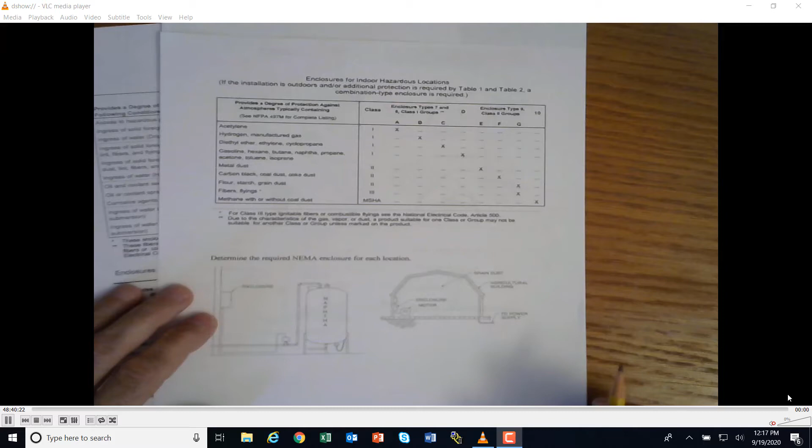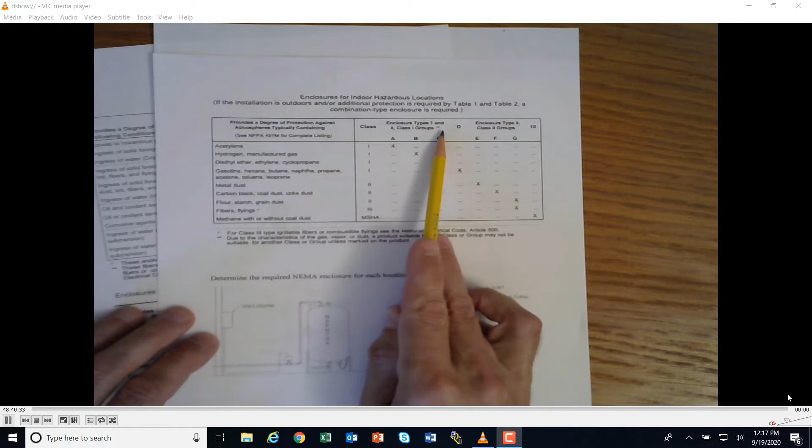We're going to take a look at our NEMA enclosures. So we're going to be working off a couple different tables. This is for indoor hazardous locations. These are my enclosure types, 7, 8, and 9, okay? If I'm talking about indoor non-hazardous locations, these are 1, 2, 4, 5, 6, 12, and 13. These are non-hazardous indoors. And then my other chart here is for outdoor non-hazardous, okay?

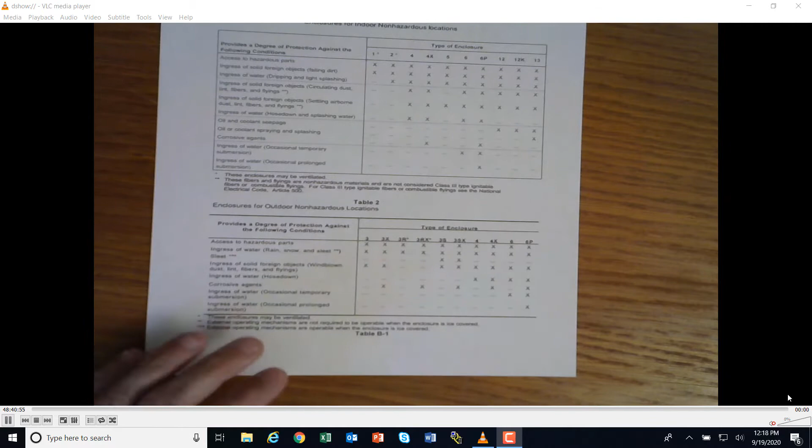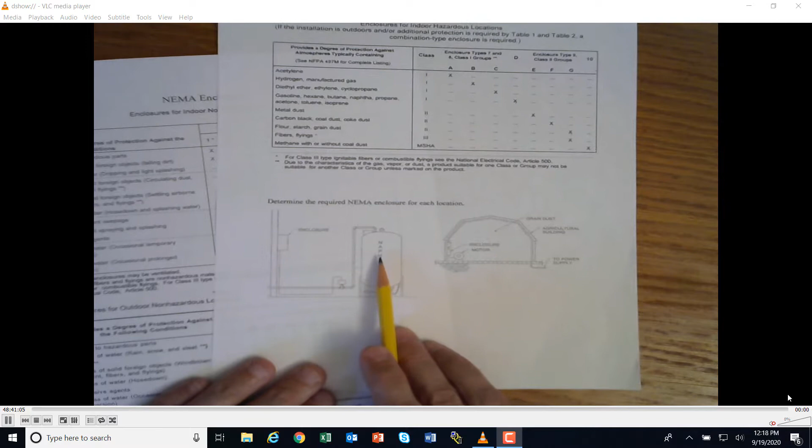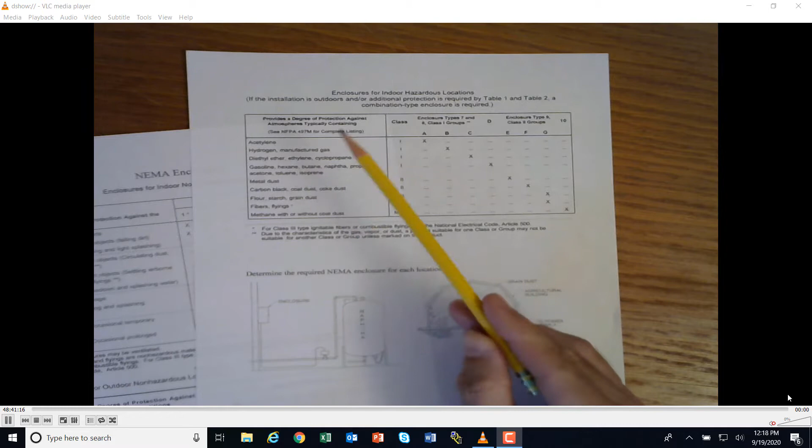So let's just take a quick look at a couple of these. The first one right here is showing a chemical, and it's inside. So this is going to be hazardous. So I need to go to the indoor hazardous location. So here's my enclosures for indoor hazardous locations. And if I start reading what kind of chemicals I'm looking at, there it's listed. It's going to be a Class 1 enclosure, and it says that I'm going to need a 7 and 8, Class 1, Group D.

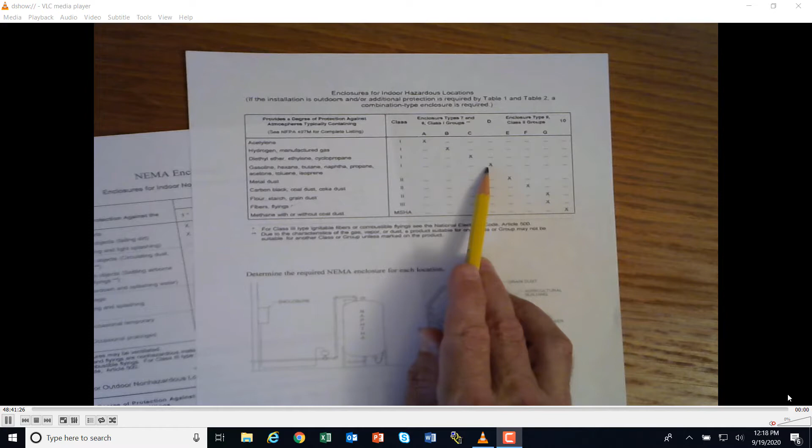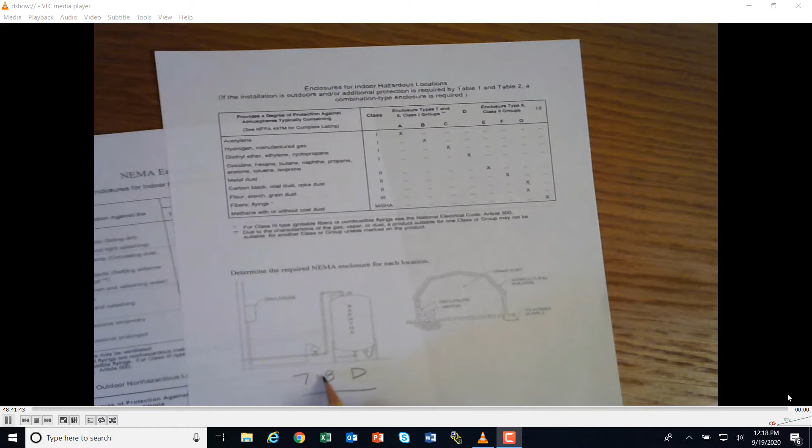So this is saying a combination 7 and 8 D is the type of enclosure that I would have to pick for this. And basically what that says is how sealed up this enclosure is going to be, how much spacing is going to be required and stuff like that, okay? Because you don't want to have any sparks here that might cause an explosion.

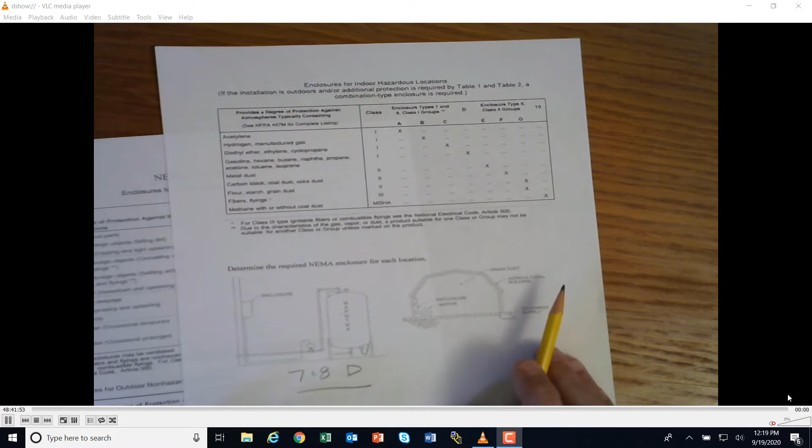Let's look at another one. This one is even more dangerous, it looks like, because we have grain dust in the air. Grain dust is really explosive. So if there's any sparks here, this is going to blow up. So you're probably going to need a totally enclosed fan-cooled motor, and you're also going to need an enclosure that's really totally enclosed and is spark-proof, okay?

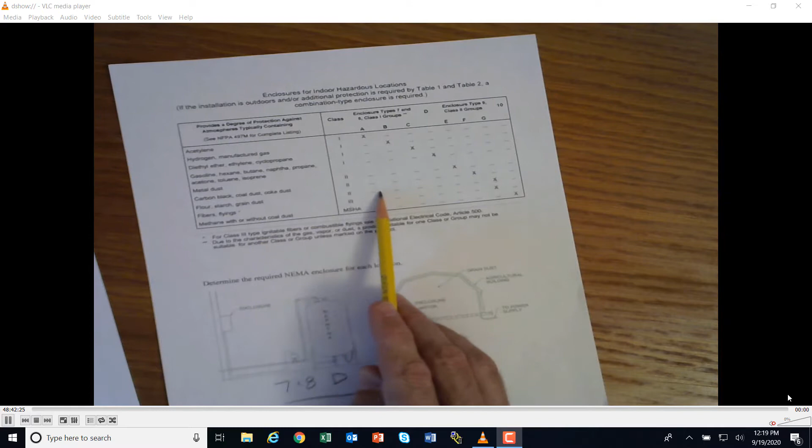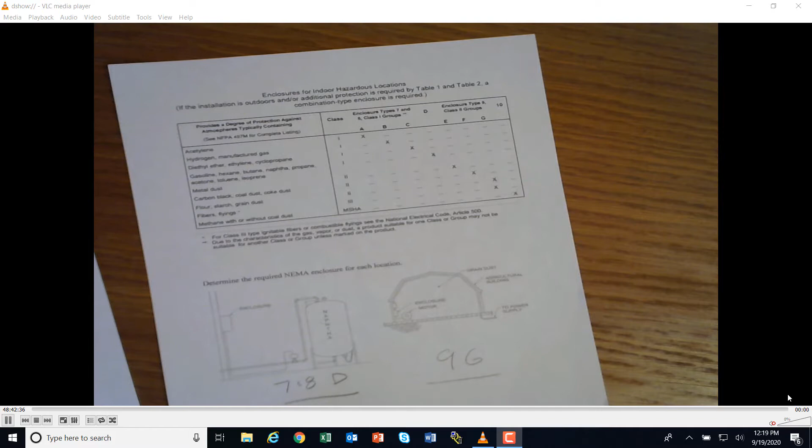So let's take a look. It's definitely indoors. It's hazardous. And if you're talking about grain dust here, you're going to need a Class 2 enclosure, and it looks like you're going to need a 9G enclosure. All right, and that's what you'd have to go with, and that would guarantee that you won't get any sparks here and you won't get an explosion.

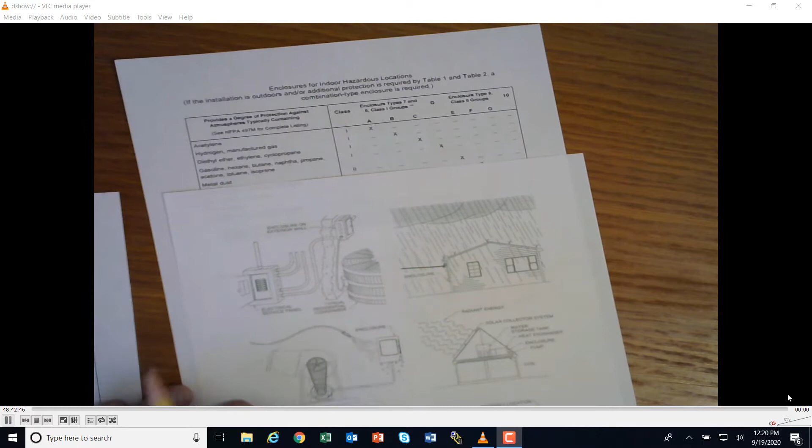Let's look at a couple more. This one right here is showing your air conditioner on the outside of your house. Now your air conditioner probably only runs in the summer. It's on the outside of your house, and it's going to get wet. But it's not going to get any snow on it. It's not going to freeze. So we're looking at outdoor non-hazardous, because your air conditioner is not going to blow up.

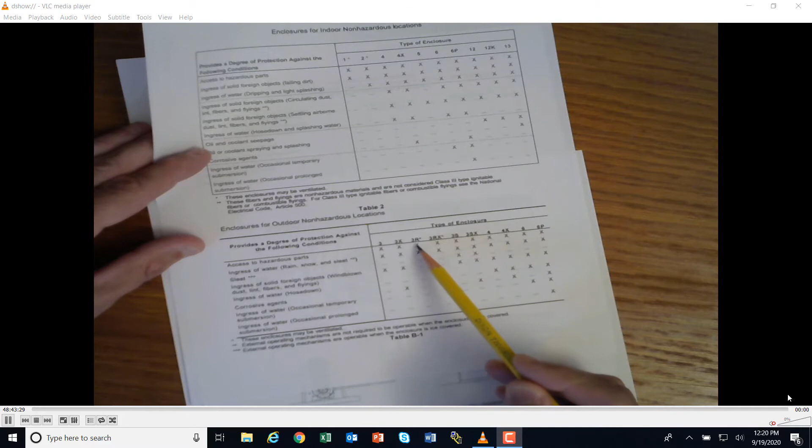So if I go to my outdoor non-hazardous, basically ingress of water, it's going to get a little water and sleet and some foreign objects from wind. That's what it's going to be exposed to. But there's really not much going on here. So probably any one of these are going to work here, a 3 or a 3R or something like these. I'm going to say that this is probably just going to need a NEMA 3 enclosure, and it's pretty inexpensive.

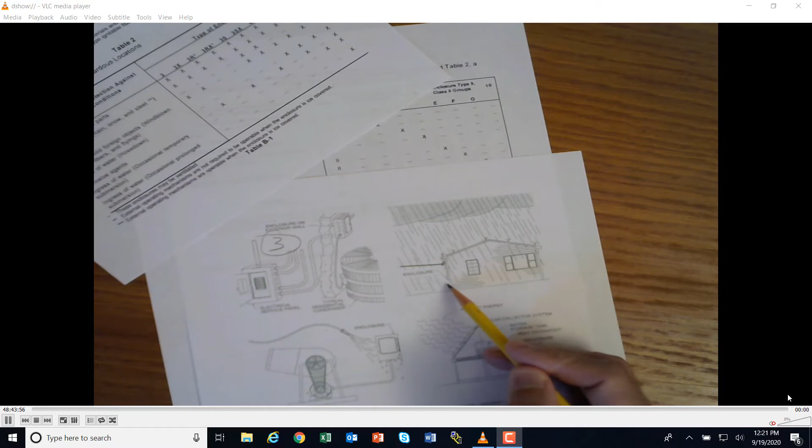This one right here is something on the side of your house. Looks like it is related to your electrical service coming in. And it's going to be, once again, rain and sleet, just like the air conditioner was. But I don't know where this house is, so maybe it's going to be exposed to the elements a little bit more, maybe freezing in the winter, okay? So once again, it's non-hazardous. If I go to the non-hazardous, I see sleet: may be operable when it is ice covered.

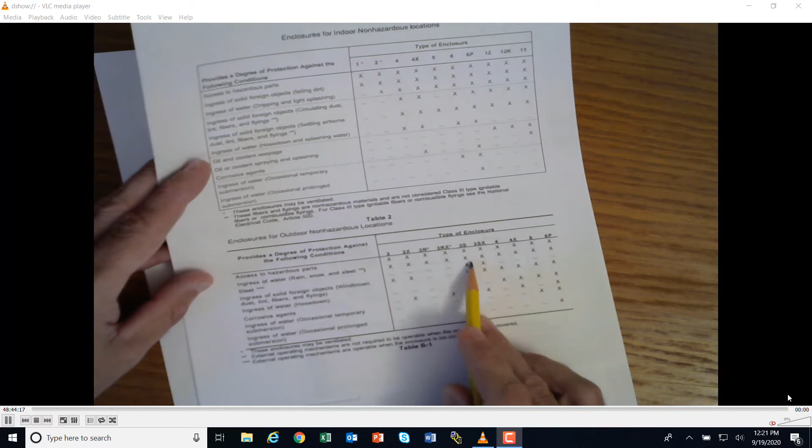Yep, so I'm just moving down this chart here a little bit, and it looks like I'm going to need a 3S enclosure, all right? And a 3S enclosure is just going to be a little bit different than this one, a little bit heavier duty, a little bit more sealed up, less ventilated, because we don't want water to get in there and then freeze, all right? Let's do some more.

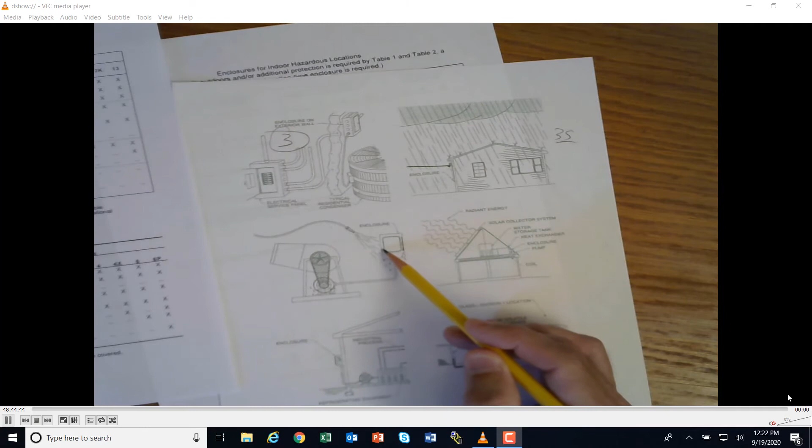Here's what looks like a cement mixer, likely running outdoors, and they're showing a hose on here, so it's going to be non-hazardous, but it's going to get drenched with the hose because there's usually a lot of water affiliated with that. A hose is a very directed spray, so let's see if we can do our outdoor non-hazardous.

Well, let's see, I need rain, sleet, foreign objects, hose down. Here's my hose down. If I'm going to get tons of water just dumped right on it, I'm going to need a NEMA 4 enclosure or a 6. One of these is going to work right here. So we're going to have at least a 4 on this one.

And this one right here is an indoor. It looks like a solar collection system, a solar panel system. And there probably isn't anything too dangerous about this. So it's going to be an indoor, non-hazardous. And if we come here, there's not much going on here. There's no water inside of there. There's no dust or anything that's going to explode.

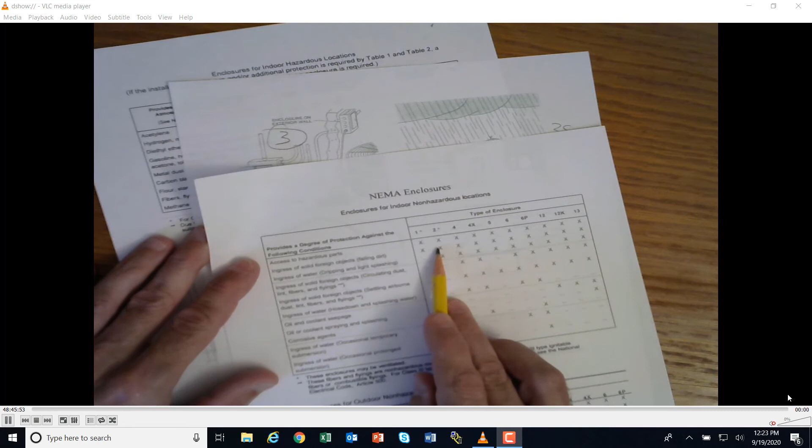So this is probably going to be the least expensive one. You're going to have probably a type 1 or 2 enclosure here, and that would allow you to connect your stuff up and secure it and keep it safe.

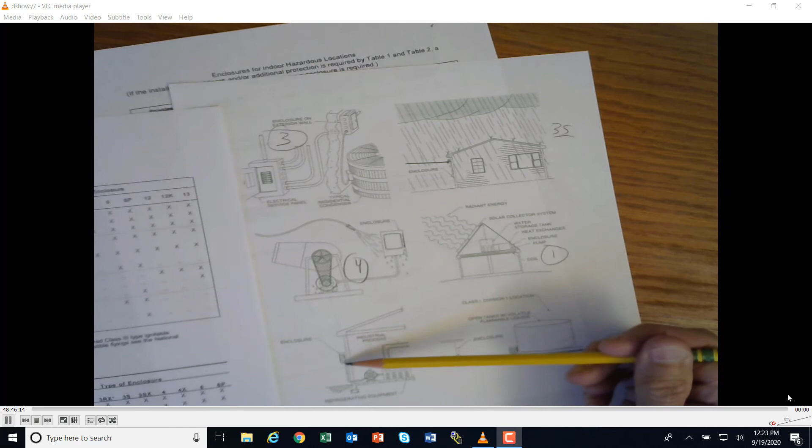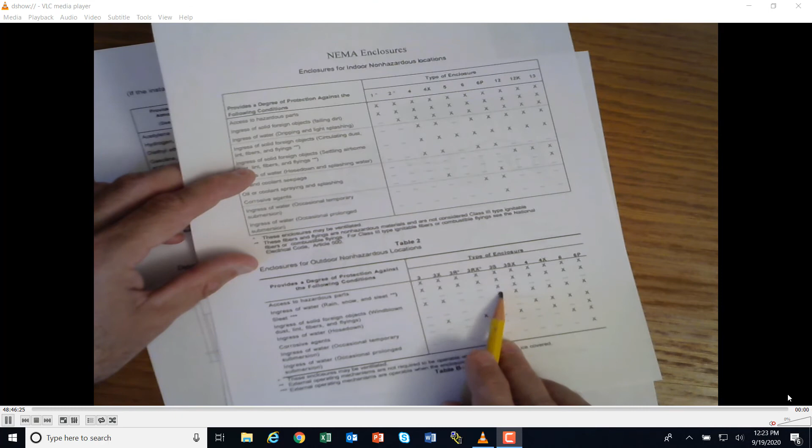Here's another one. This is an outdoor, and we already kind of looked at this one. Refrigeration. This is non-hazardous, outdoor, and we probably want to do a little bit of service here. Outdoor non-hazardous probably depends on whether it's going to be freezing in the winter or not. So you're probably looking at a 3 or a 4 enclosure here. I'm just going to put a 4 on here, because it's industrial and you might see some other activity there.

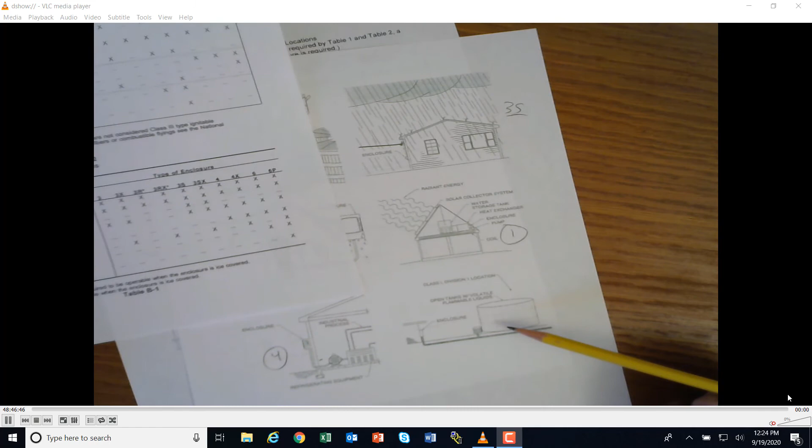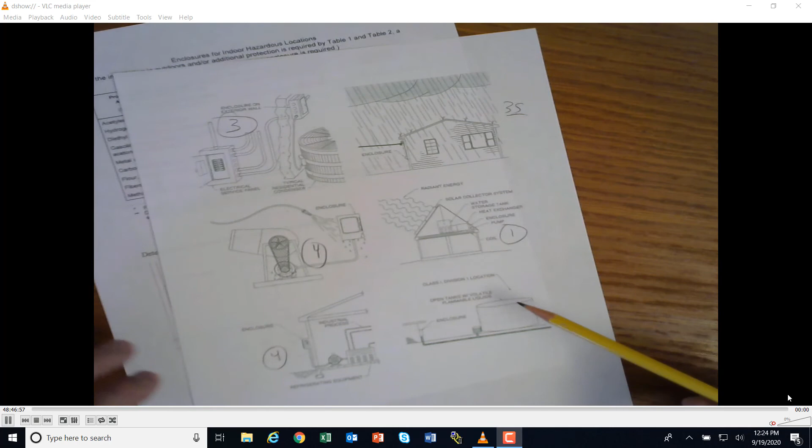Okay. Finally, we have an outdoor, and we have a tank with flammable liquids. Well, you say, that's outdoors, but it's still hazardous because this could explode. So you don't have any outdoor hazardous charts, but because it's a Class 1 Division 1 location, we need to take a look at the Class 1 enclosures that were listed for indoor hazardous locations. Okay, so it's going to be a Class 1. We will use this chart.

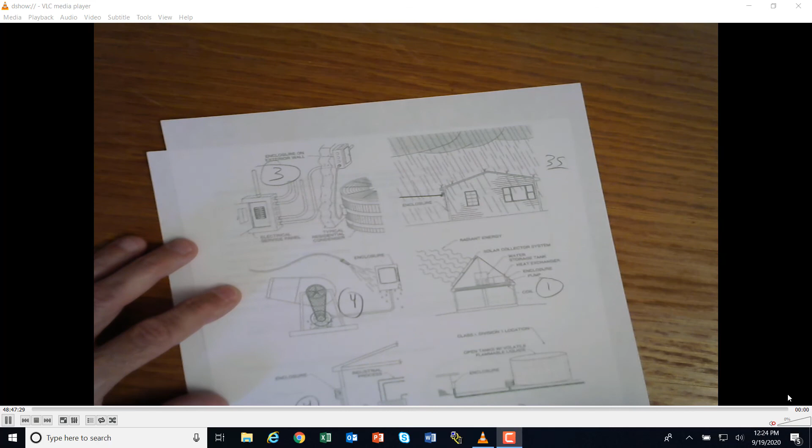They said it was flammable, so something like gasoline, and it's coming right here. We're going to need a 7 and 8D enclosure, and that will be a little bit more spark proof than just having an open enclosure or something like that, because we do not want that to explode. Okay. So that's how to use these charts to identify what NEMA enclosure you would need.